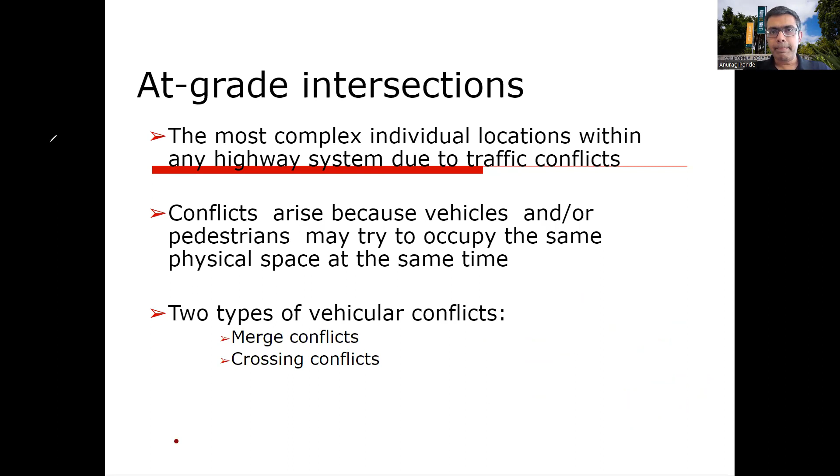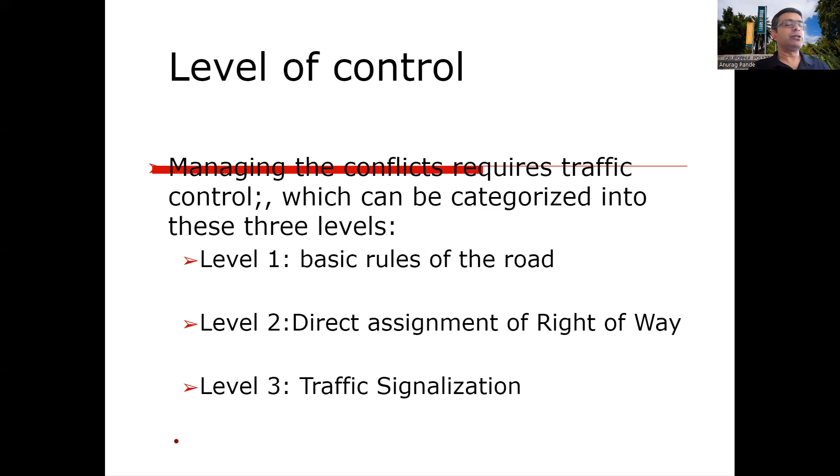So what we do to manage these conflicts is have this level of control, which can be categorized into 3 levels. One is basic rules of the road. Sometimes you will see intersections with no traffic controls - you would come across those, not always, but you might come across them in neighborhood streets, for example. There, you have the basic rules of the road, where the drivers on the left will yield to the drivers on the right. Then there is direct assignment of right-of-way - that's your yield sign or your stop sign. So that's another level of traffic control. You're directly assigning right-of-way. When you come to an intersection, if you have the stop sign, then the other person has the right-of-way. Or if it's a 4-way stop, whoever comes first has the right-of-way. So those are your direct assignment of right-of-way. And then level 3 is basically the highest level of traffic control, which is the traffic signal.

So in basic rules of the road, right-of-way is not assigned. Driver on the left yields to a driver on the right. And then through vehicles have the right-of-way over turning vehicles. You see these types of situations sometimes when you have one person making a left turn into a driveway - that's kind of an intersection, but there is no stop sign or yield sign for the left-turning folks, and they're just automatically supposed to yield to the people who are going through. So that's your basic rules of the road, and one of those rules is through vehicles have the right of way over the turning vehicle.

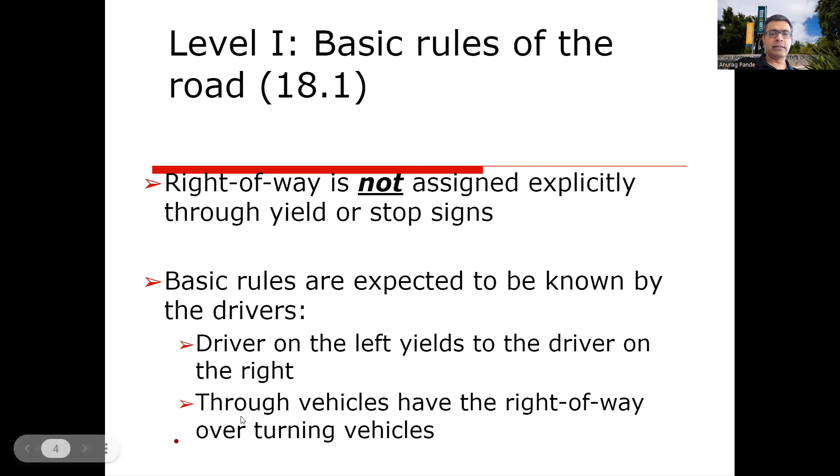So this is something that becomes important, and we'll do some problems based on this once we've covered this chapter: the limitation of sight distance at intersections caused by buildings or other obstructions. This creates a line of sight issue.

A related concept is daylighting the intersection. That means eliminating any potential hindrances that might block the driver's view of pedestrians, bicyclists, or other approaching cars, because sometimes the sight triangle might not be clear at an intersection.

So for example, if you look at an intersection like this, I'm just going to quickly draw this out.

At an intersection, sometimes you have a car approaching from this direction, a car approaching from this direction right here, and a car coming from here. They need to be able to see what's going on around them. If there is traffic approaching from this direction, they need to be able to see without any obstruction what's going on over here, and who's coming from here.

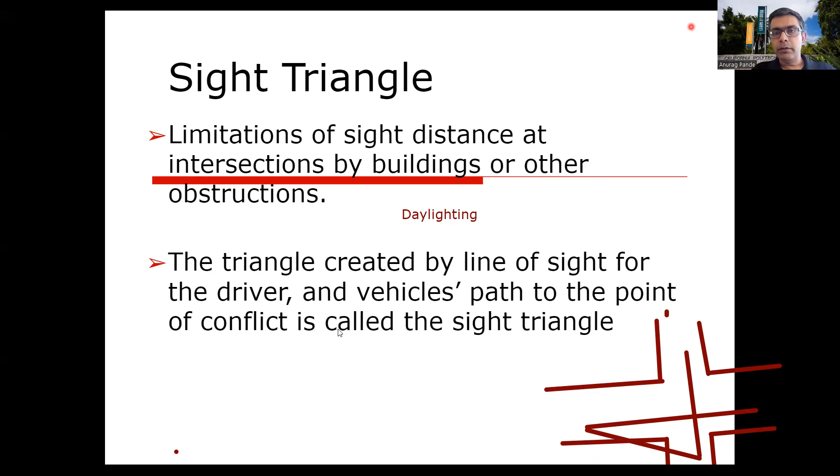Level 2 control includes your two-way stop, yield control, and multi-way stop control. All-way stop controls are typically not something we want to implement. They exist—in some shopping centers, for example—but they can be very confusing: who came first, how do pedestrians get yielded to. It could be confusing, but in some ways they're useful because everybody is at least expected to come to a full stop, or at least a rolling stop, in California.

Multi-way stop control is also a level 2 control—there is no traffic signal. We talked about warrants for traffic signals when discussing traffic studies; there are also warrants for stop controls. They're not as detailed, and if you can interpret signal warrants, you can interpret stop sign warrants just as easily. That's not an issue at all, but those also have some conditions governing them.

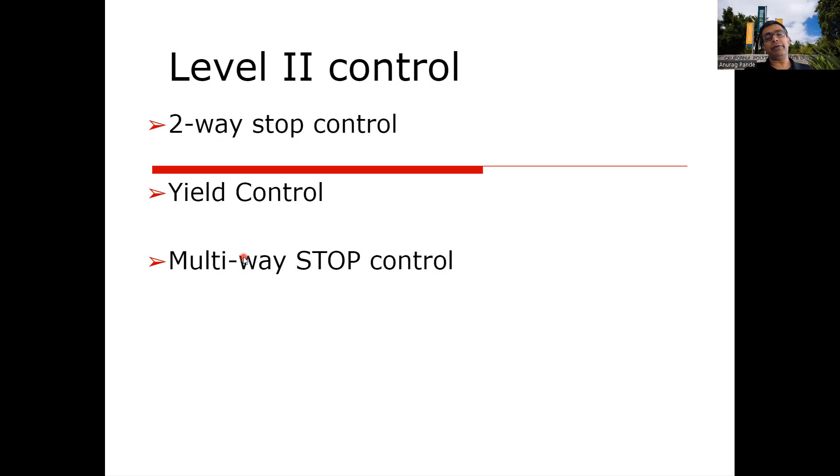So putting a stop sign, when can you put a stop sign versus not? Again, there are stop sign warrants and there are multi-way stop control warrants. So there are warrants for all of these different levels of traffic control. So we'll talk about traffic signal control, obviously mother of all traffic controls. And the idea is that the assignment of right of way is going to be complete.

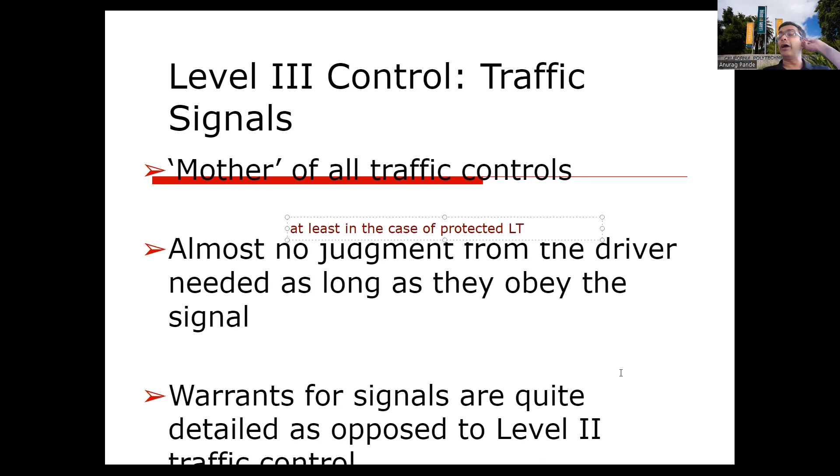The drivers won't have to apply any judgment at that point. But that's not fully true, right? Because you would have permitted left turns. So when I say almost no judgment, I'm also talking about at least in the case of protected left turn. At least in the case of protected left turn, no judgment would be required. But then again, if you have permitted left turn, so that's your green ball rather than green arrow.

So do you know what mechanism are we using now? We are trying to move away from that green ball for the permitted left turn. You know what mechanism are we using? Anybody? Yeah, back there, Max. Yeah, it's a flashing yellow arrow, FYA, flashing yellow arrow. That's basically your permitted left turn.

For protected permitted, is it just the doghouse light? Doghouse light? The 5 light array? Yeah. So sometimes some signals have both protected left turn phases and then they allow some permitted left turn as well, right? So there you need sort of both of those things, right?

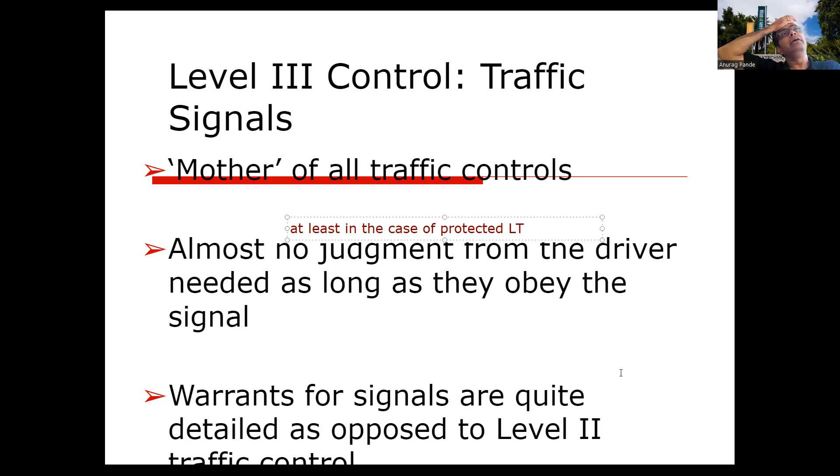So you need to be able to show a green arrow, but then if there's a flashing yellow arrow, you might be able to denote that. Although right now, I don't think a lot of communities have implemented flashing yellow arrow with a protected green arrow turn. So that's also sort of a work in progress, the flashing arrow implementation, but it's really been found to be way safer than the green ball indicator. That's basically what's used here. And as I said, warrants for signals are very detailed.

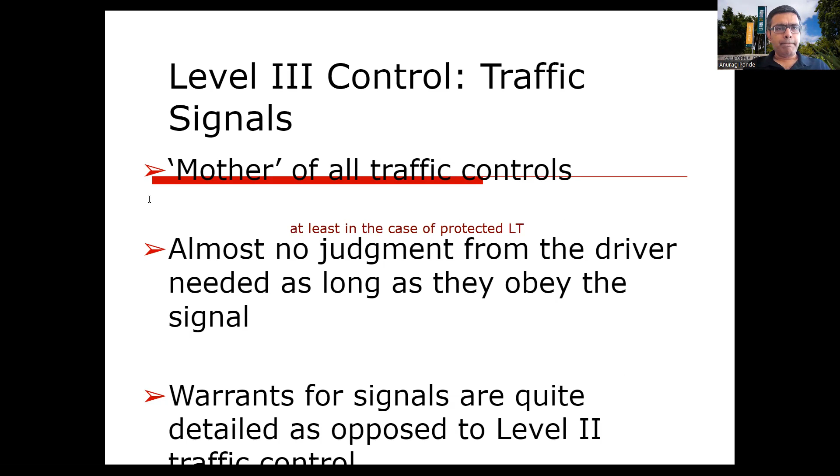And then when you get to the signal control, there is pre-timed and actuated control. We talked about that a little bit. And in actuated control, we have semi-actuated, fully actuated. And then there is this volume density control, and sometimes it's called adaptive signals that are completely reliant on not detecting individual vehicles, but sort of looking at what's happening overall at the intersection approach, what type of volume is approaching, what type of congestion is happening on each of these lanes. So those are sort of your more advanced type of signals that are called volume density control.

And they also have sort of great detection capabilities, but they're detecting not like group detectors. In the case of semi-actuated and fully actuated control signals, they're trying to detect the presence of individual vehicle over the detector or on the camera. But in volume density control, those signals are looking at sort of multiple vehicles, what's happening with the volume, what's the rate of the volume coming in on the approach, and what's the density, how much congestion there is, so that they can anticipate what's going to be the demand at the intersection in the very near future.

And then, so those are sort of the advanced type of signals. Again, the point of all of these is to become more demand responsive, right? And obviously demand responsive signals like actuated and fully actuated and even volume density, they have value in terms of operations, right? Because they can really minimize the delay compared to a pre-timed signal.

Still, you might have noticed that when there is construction on the road, sometimes they would convert that signal into a pre-timed signal. And that can be pretty frustrating because that means if they have construction going on and the detectors, for example, are not working because they've dug up the road or whatever, and there is something wrong with the detectors, sometimes the detectors go bad, or sometimes their camera system doesn't work. Whatever is the reason, we switch over to pre-timed operation, and that can be pretty frustrating because you're saying there is no demand that's competing with you, but you still have to stop.

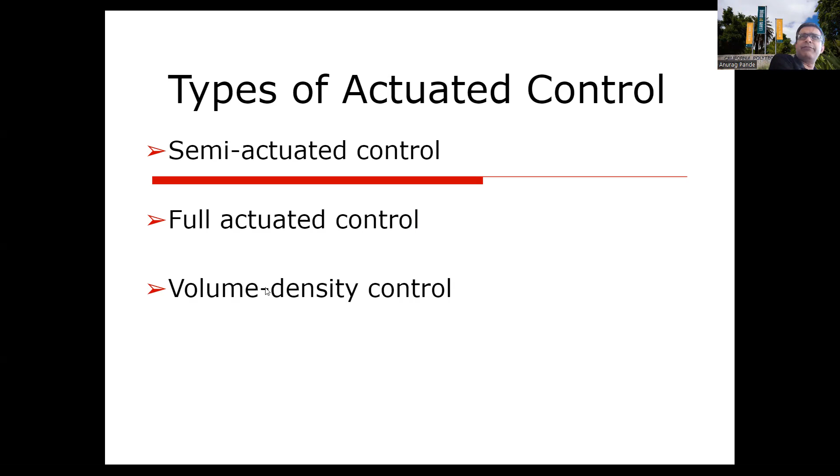That's why we've pretty much moved away from pre-timed signal design only. We do pre-timing of signals, but either because of construction, or when we can make sure there is demand coming in from all sides so no side is completely uncongested. So every side is fully congested, and then every signal cycle just maxes out. We'll talk about what maxing out is, but the idea is it just runs its course. You can only give that approach so much green, and it has taken that green time. So that's like a fully congested situation or a coordinated signal cycle basis where we use pre-timed signals. But other than that, we run actuated signal control because they're good for both safety and operations.

So let's now talk about actual signal timing. Today's lecture will get to the point of dealing with yellow and all-red intervals, because those are important from a safety perspective as well. But signal phasing is also important because signal phasing is the sequence of individual phases.

Signal phasing is the sequence of individual signal phases, or combination of phases, within a cycle that defines the order. When we say individual phases or combination of phases, there could be multiple phases. For example, there could be a permitted-protected phase, which is sometimes thought of as a single phase. So it's a sequence of either single phases or combinations of phases within a cycle that define the order in which various pedestrian and vehicle movements are assigned the right of way.

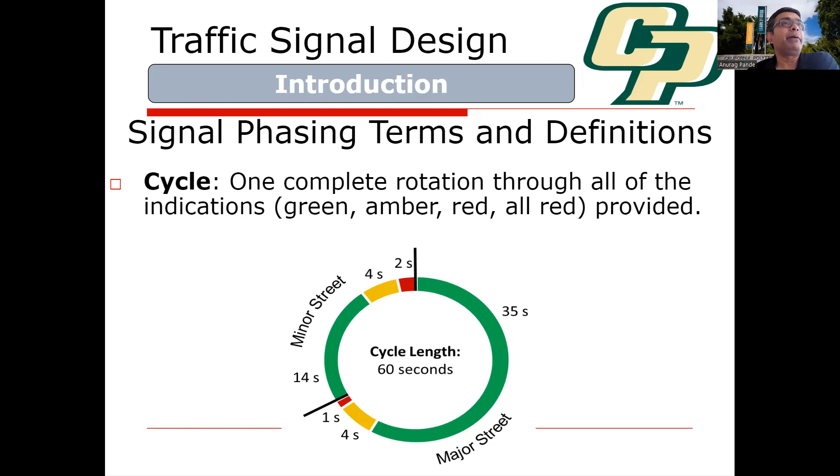I think we should probably favor safety. We should, but it doesn't always happen. And the drivers are pretty frustrated about delays, and that's the problem right there. Yes. I'm just curious, is there a point where it would just be easier to consider a flyover ramp for a certain movement? Yeah, but those are very, very expensive.

So the question is, at what point do we give up on the signal and start thinking, okay, maybe we just need a grade separated intersection, just design an interchange or ramp. Typically you won't see that unless it's an uninterrupted flow facility itself, like a 101, Highway 1 type thing. Even on Highway 1, you will see some traffic signals.

So there is that benefit cost analysis that has to be done then, right? But before you get to that point, because creating an interchange is such a high cost project, we try to minimize that to the extent possible. So that would be a good idea to think about, grade separating the intersections, and we do have to do that a lot of times, but that's not always the ideal situation.

Because it's so expensive. Signal phasing terms and definitions: cycle length, the time in seconds that it takes a signal to complete one full cycle of indication. Usual values are between 40 and 180 seconds, measured in 5-second increments.

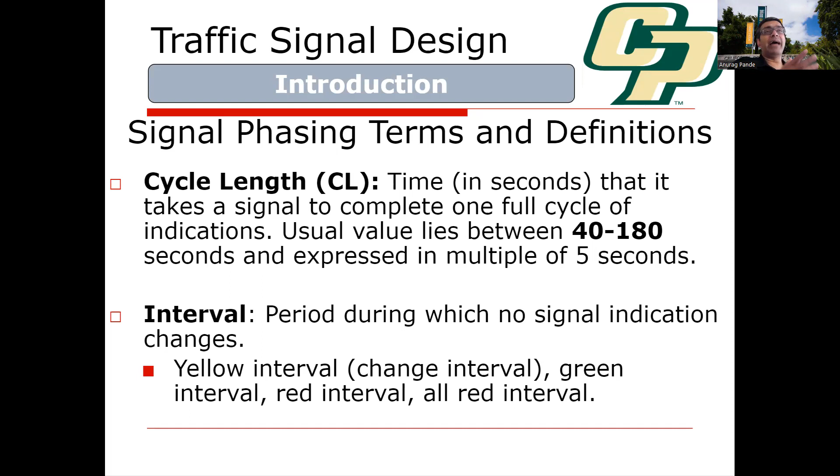Okay. Interval is the period during which no signal indication changes. The yellow interval is the change interval. So basically the interval where nothing changes in the cycle, that's your interval. It could be the yellow interval, the green interval for a certain approach, the red interval for that approach, and then the all-red interval when all approaches are red, which we require for safety to clear out the intersection.

A phase includes the green interval, the change interval, and the all-red interval. So a phase would include the green time, yellow time, and all-red time for that phase. And all-red time is also called the clearance interval.

So a phase is a sum of 3 different indication times: yellow, green, and all red, right? Saturation flow rate, maximum number of vehicles observed per unit time of green, right? So per unit time means per hour of green. So the unit for saturation flow rate is vehicles per hour of green per lane. Okay, that's your saturation flow rate.

On a typical intersection lane, if it's a flat, your typical urban intersection with the speeds that we have in our urban areas, unfortunately, 40, 45 miles an hour, you're talking about maybe 1800. That's a pretty high number, but you can achieve that. Yes. NCHRP uses 1700. 1700 is probably right, they use a little bit lower value, because they're probably assuming a little bit lower approach speed. Down to 1400 if you start doing heavy vehicles.

Right. And it could change if you have a lot of right turners, for example, within that approach. So those numbers could go down. But typically, 1900 is probably the highest limit that you would see. NCHRP, as was mentioned, uses around 1700, which is reasonable. Again, you could probably get this up if you raise the speed, right? If the approach speed is high, you could probably move more vehicles per hour of green, but you probably don't want that, at least not in all cases.

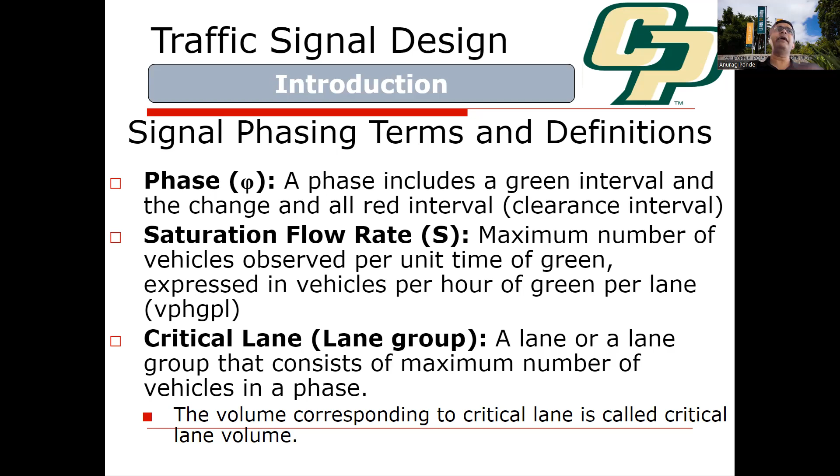So your critical lane group, when you're assigning the green time, what are you going to base your timing on? The critical lane group is what you're going to base it on. So if your eastbound has higher demand, then you're going to base your timing on eastbound traffic. If westbound has higher demand, then that becomes your critical lane group.

So signal phasing is observed during peak hour, right? So basically we want to observe. So for capacity of the signal and timing of the signal, it's very important that we make an estimate of what we call the saturation flow rate. Okay, saturation flow rate happens during peak hour, right? So we need a pretty good amount of traffic.

And saturation flow rate is the flow rate at which, if there is a steady stream of demand, right? If there is pretty heavy demand and you had continuous green on a signal, at what rate would you be able to discharge the vehicles? That's your saturation flow rate. So you require saturated flow conditions to be able to observe that for the most part.

Maximum number of vehicles per unit of time per green cycle: observe the full stream of vehicles passing through the green. If a full stream of vehicles kept coming and coming, how many vehicles would you be able to pass through?

Now the question is, what happens if you have a signal where there is demand, but it's not saturation demand? How would you estimate saturation flow rate in that scenario?

Yeah, do you want to say something? I was gonna say just estimate it based off the traffic volumes, percent trucks, and how many right turning vehicles there are, and just use the HCM equation. Right, there is an HCM equation for it. There are two ways of doing that work.

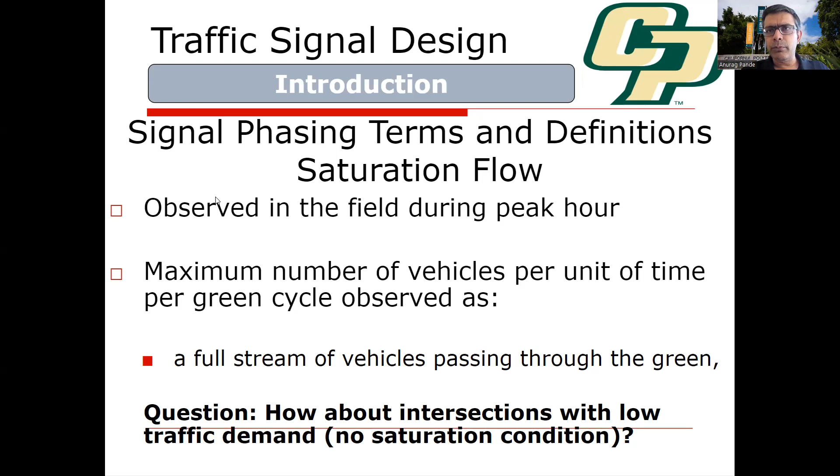But there's actually another way, by collecting data, maybe not under fully saturated conditions, but even under mildly saturated conditions. That work is done using... let me go back to an empty sheet here, so let me show you.

Let's see if I can draw some boxes. Let's say this is an intersection approach. You're approaching an intersection, and this is the intersection right here, with my stoplight over here, and my stop line right here. Now I have cars that are stopped here. Obviously I don't have a fully saturated condition, because once the light turns green, these cars will flow through and empty out.

So I don't actually have to wait for fully saturated, absolutely congested conditions to develop. I might be able to estimate my saturation flow rate anytime I have at least 5 vehicles lining up at a red light, then I can estimate the saturation flow rate for that approach. We used to do a lab on that, and you might still do it in this year's class.

How do we do that? We do that by looking at, on the red cycle, when the signal is red, there will be a queue of vehicles, and we need the queue to be at least 5 vehicles—the longer the better, but at least 5 vehicles have to be in the queue for us to do this estimation of saturation flow rate.

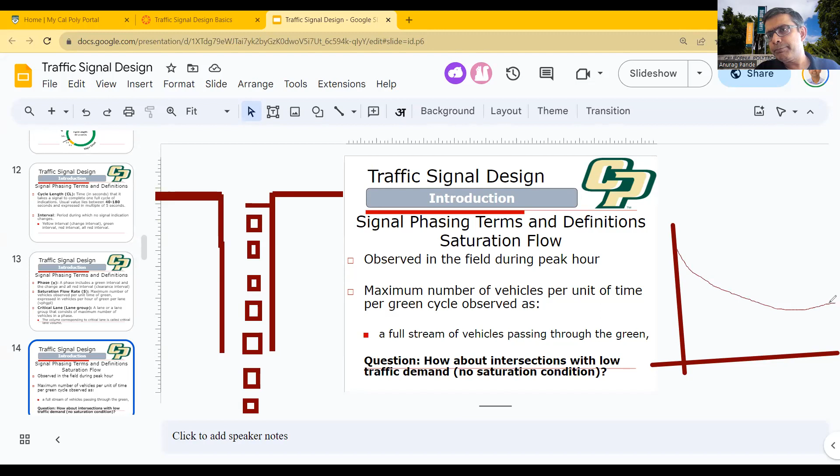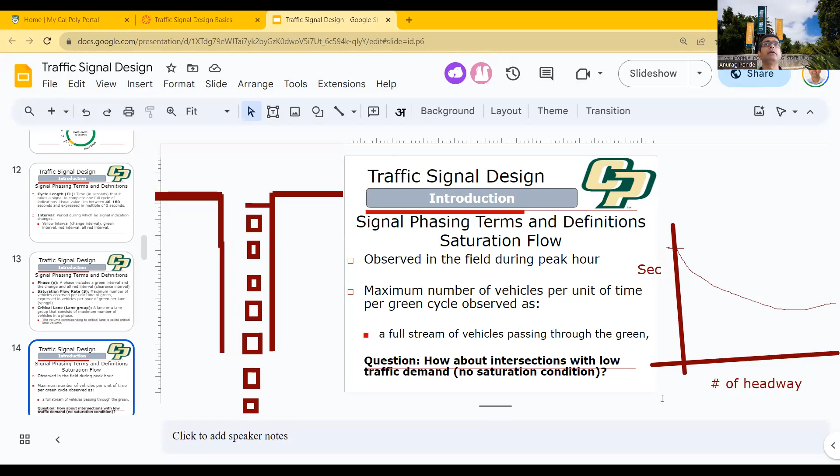What will happen is that the gap between the first and second vehicle is your first headway. Here you'll have number of headway on the x-axis, and time in seconds on the other axis. That time will be pretty high for the first headway, or you can even think of it as the 0th headway, where number of headway is 0. This is the time between when the light turns green and the first person crosses this stop line right here.

So when the light turns green and the first person crosses the stop line, that's your 0th headway. Your first headway would be the difference between when this person passes the line versus when the next person passes the line. That second headway would be a little smaller, the third even smaller, the fourth even smaller, because these subsequent vehicles have had time to react to the green light. They're ready to go.

As their time comes, this gap keeps reducing, and after the fourth or fifth headway, this becomes sort of a constant line of vehicles. Once you've established that saturation, this becomes your saturation headway. So if you have more, that's great, but headways after the fourth or fifth become constant, and that's what we call the saturation headway. This time interval, if you draw a line from here, is called the saturation headway.

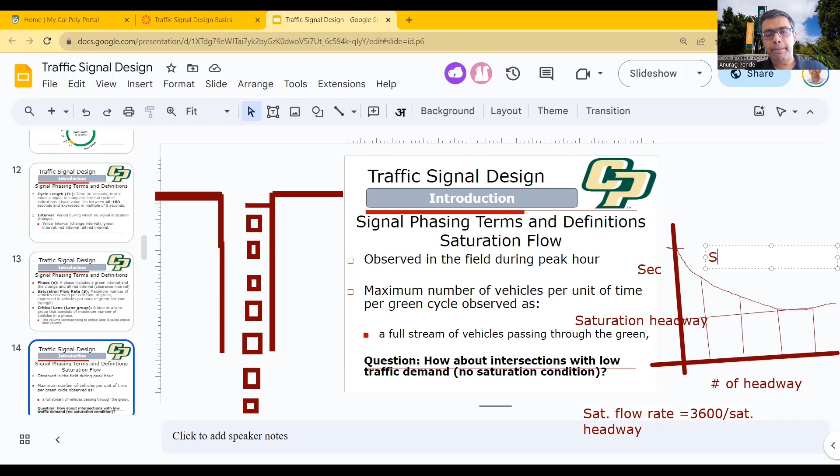We add up all these times that you're losing over and above the saturation headway. For startup lost time, we're adding the time from here to here, here to here, here to here, and whatever this little thing is. If there's anything like that over there, then that time as well. So you add up those times and that's your startup lost time.

We can estimate saturation flow rate even from a field study, and there would be an example of this as well, so we'll work that out. But that's your saturation flow rate. So let's go next here.

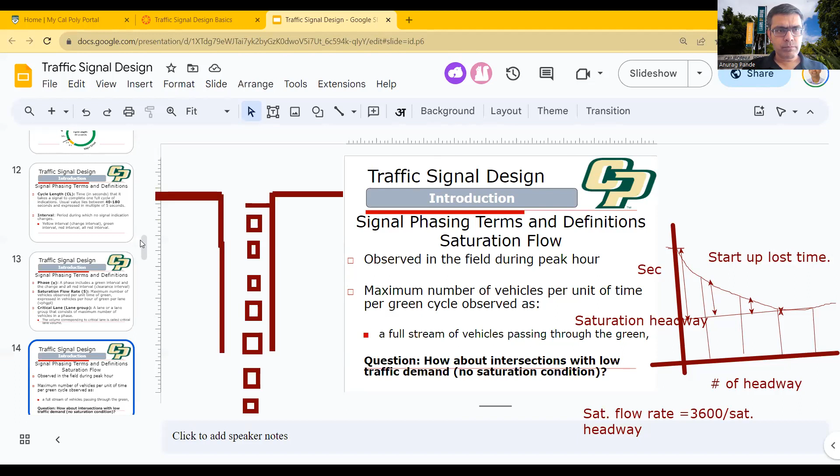Lost time is the wasted time during which no one is getting into the intersection - nobody can move. It's a big determinant of capacity and delay. It occurs twice at each phase, so as you add phases, you're losing time twice - once at the startup, once at the end. At the beginning of the phase, L1, usually about 2 seconds are lost at startup. Then at the end of the phase, about 1 to 3 seconds are lost. That's another sort of lost time.

Lost time per cycle is about - if you have anywhere between 2 to 4 phases, you could end up losing anywhere from 6 to 20 seconds every cycle you run. You could say, okay, if I'm talking about hourly, I can minimize my lost time by minimizing my number of cycles. But again, that's bad because then you're getting into pretty long cycles, so that's not always ideal either. More phases obviously lead to more delay, and you can't keep making the cycle longer to avoid those delays - there are no free lunches to be had either. But again, from a safety perspective, you still might need more phases.

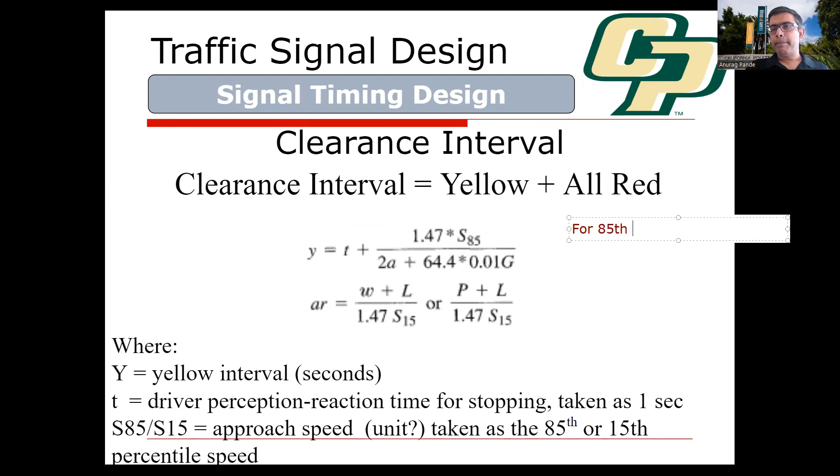Add 5 miles per hour to the speed limit for the 85th percentile. And then for the 15th, subtract 5 miles per hour from the speed limit. That's usually the case, so 15th to 85th is your 10 miles per hour pace, which is reasonable.

But again, this is like interrupted flow you're talking about, right? So think about the context here. If you have traffic signals on an approach, that means you have an interrupted flow situation, and that means you're not talking about a freeway. A freeway won't have a red light or anything like that. So this is an interrupted flow situation where speeds are lower, and going above 5 miles per hour is a fairly reasonable question. So that's a rule of thumb you could use.

For S85, you can add 5 miles per hour to the speed limit. For S15, you can subtract it. That makes the yellow interval larger and the all-red interval larger as well if you apply these formulas and not directly the speed limit, which I think is reasonable because you want to be more conservative when you provide these. Obviously, if you have an all-red interval and yellow interval, that means nobody would move for some time, and that could happen, but that's okay because that might be reasonable given the safety considerations.

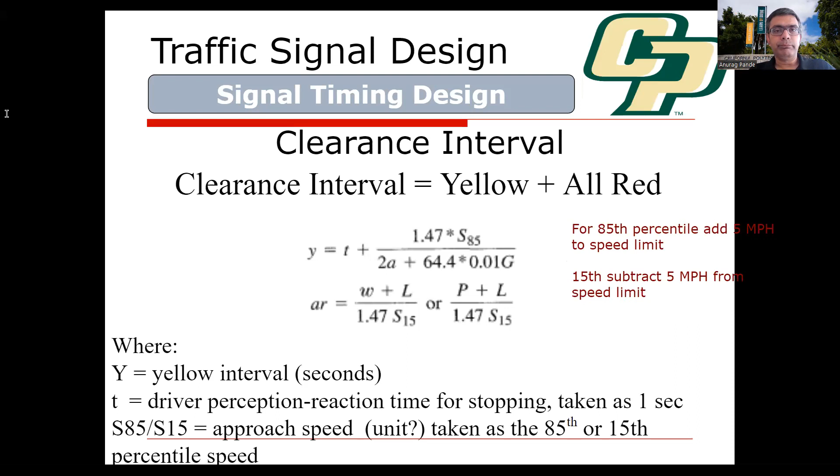So this clearance interval, the range of yellow interval is 2.5 to 6 seconds, rounded up to the nearest 1/10 of a second. And then the range of all-red interval is between 1 to 3 seconds. That's the typical value you would find in most places.

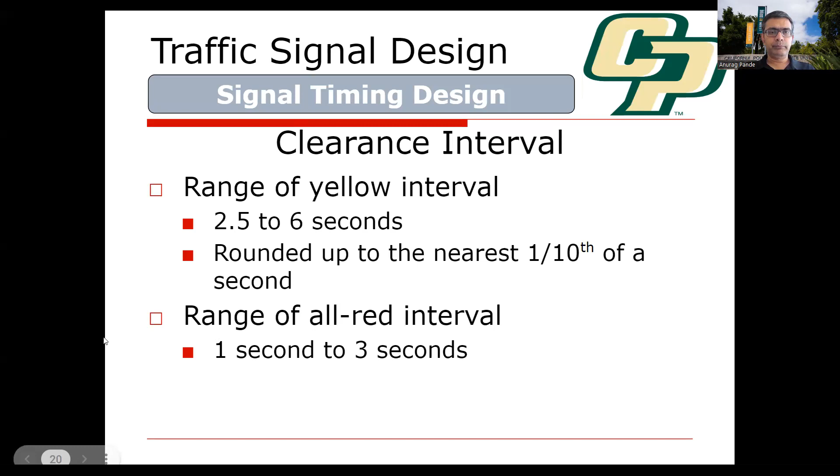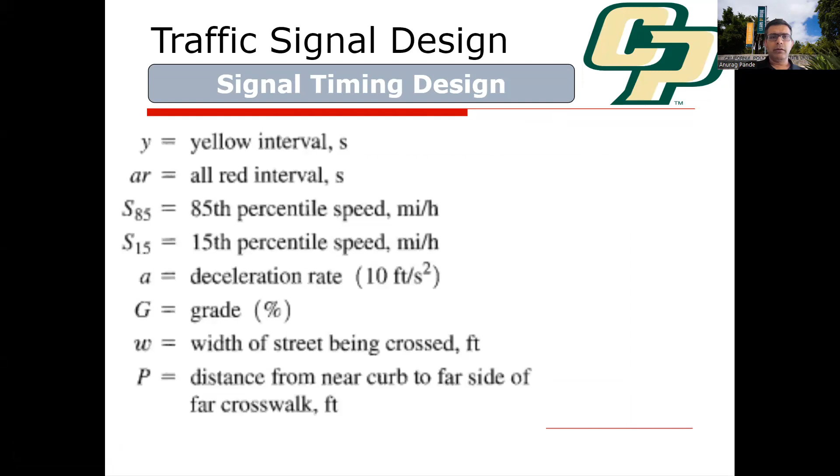Now, this is what happens if you look at that yellow interval, and you estimate from that yellow interval how much distance you can travel if you're traveling at the 85th percentile speed. There is a location that sort of becomes what we call the dilemma zone.

So think about this: the idea is that if you are very far from the signal and you see the light turning yellow, they observe that most drivers from that point stop. But there comes a point where the percentage of drivers that decide to stop, and the percentage of drivers that decide to just go on yellow—maybe pedal, or just put the gas on and go—becomes higher at that point.

So this is what we call the dilemma zone, and we'll work out a problem on the dilemma zone as well. But the idea is it's the zone at which you start to see some drivers deciding to stop and some drivers deciding to go. That could happen at any location, but there are specific thresholds at which we start to see almost everybody goes from here.

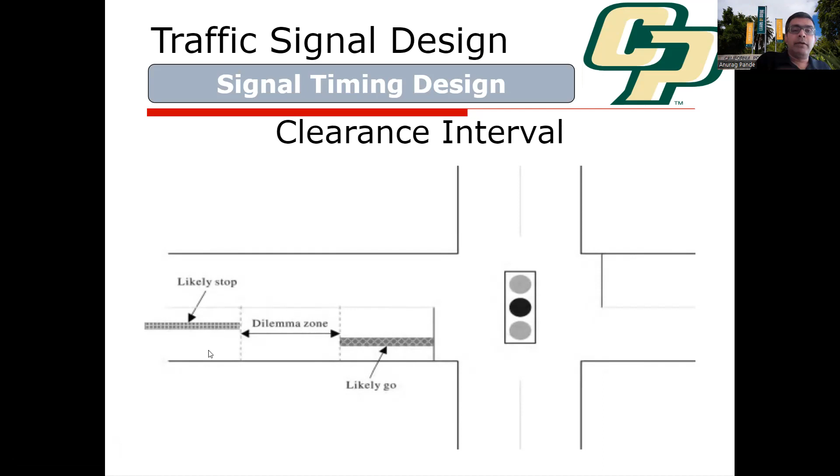If drivers are close to the stop line, up until a certain distance, everybody just goes. Beyond a certain distance, everybody just stops. But in the middle, maybe there's a zone where if you're very close to this first line, instead of 100% being able to go, 70% will go and 30% will decide to stop. In the middle, maybe it's 50-50. Further back, it's 70-30 in the opposite direction, meaning 70% start to stop, 30% want to go. That's what causes signals to sometimes make the rear end crash problem worse.

This is the phenomenon that causes it. Because there's a dilemma zone where some drivers will say, yeah, I could probably accelerate and just go, while other drivers will say, okay no, I need to stop. That's what causes problems.

With actuated signals, can't they implement something called advanced yellow light dilemma zone detection, that detects when the signal is about to end, and only puts on the yellow phase when it detects no vehicles are in the dilemma zone?

Yeah, those are sort of actuated technologies, but they're not something you'll find at every signal. Most signals have the yellow signal specifically timed for each phase. So most locations won't have that, but there are some newer technologies where the light won't turn yellow until there are no vehicles in the dilemma zone identified for that location.

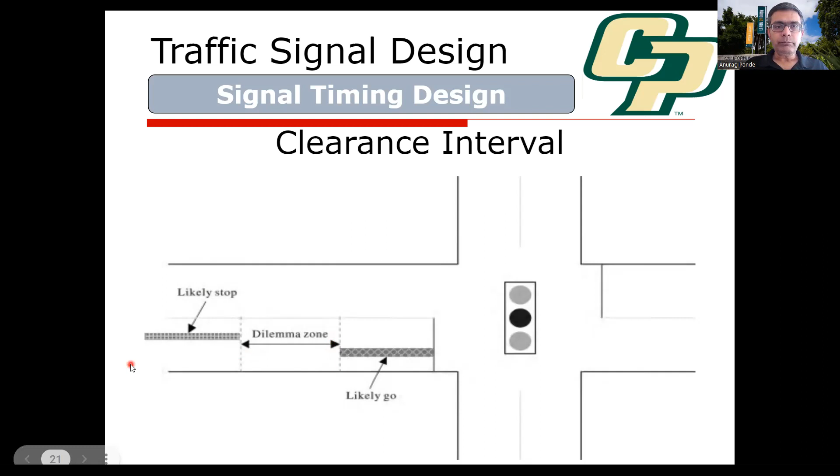So let's talk about some quick questions. What's the purpose of having a yellow change interval as a component of traffic signal timing? Options include: to clear the intersection of vehicles, to reduce the likelihood of right angle crashes at the intersection, to inform drivers that the right of way is about to end and they should stop, or to allow the driver to safely cross the intersection if they're unable to stop before the signal turns red. So what's the reason, or is it all of the above? What do you think? If you see more than one answer as correct, you can guess.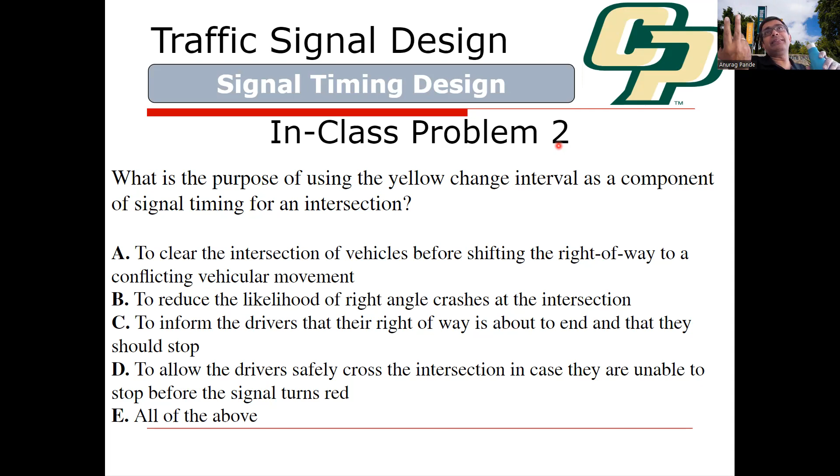Actually, the answer is all of the above. The yellow change interval warns drivers to safely stop at the intersection, or lets them safely cross if they're unable to stop. When you see a yellow light, that's the time to make a decision: should I start to cross, make my maneuver so I can cross, or should I start applying brakes? That depends on the distance, and that leads to what we call the dilemma zone.

B is also correct: clearing the intersection by shifting the right of way. The yellow change interval reduces the likelihood of both right angle and head-on crashes, depending on the phase sequence. So if you have left-turning vehicles or crossing vehicles coming in, there will be fewer crashes of that type.

Obviously, if you have east-west, and right after east-west, north-south goes, then you're talking about right-angle collisions. Otherwise, you're talking sort of head-on crashes between the left turners and the through vehicles, if the ordering of the phase is such.

Yellow principle should warn the drivers. So this is sort of the principal purpose. If you're asked the principal purpose, that would be to let the drivers know that the signal is about to change. And I know a lot of countries, not the US obviously, will use yellow at the start of the green signal as well. Having driven in the US for such a long time, I find that confusing now. But there are countries that use yellow at the start of the green phase as well, so they might find the situation here confusing. It just depends on what you're used to.

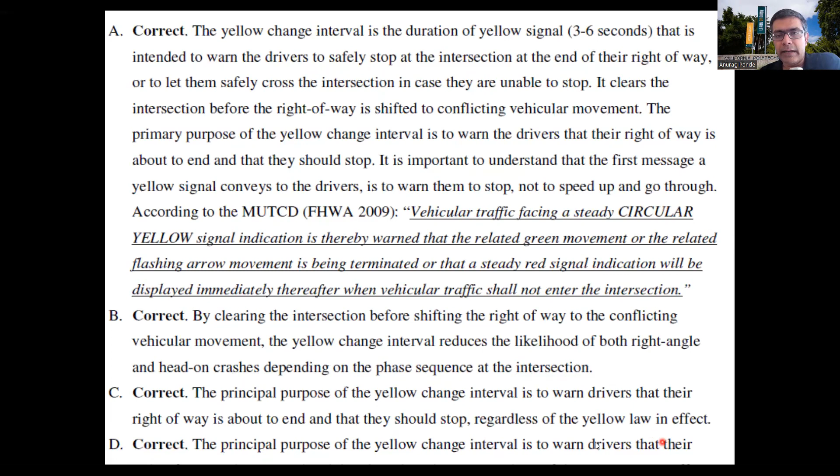And then principal purpose, again, another principle: warn drivers that their right of way is about to end. So basically, change is about to happen. So all of these are sort of correct answers.

Correct statement: yellow change interval at a signalized intersection. Which one do you think is the most correct statement here? Let's give it one read, maybe talk to your neighbor and see if you can figure this out. Take a minute to read through this. Talk to your neighbor, maybe. Thoughts, questions? Does your neighbor agree with you? Think about that.

The purpose of the yellow interval is to clear both the vehicles and the pedestrians from intersections. Does that sound right? No, right? That's not correct, because the all-red interval is for that. So A is not the right answer. Yellow change interval is an unnecessary application at an intersection where a red clearance interval is used. No, because the principal purpose, as we saw, is to let the drivers know that the right of way is about to change, right? So that's sort of a transition phase. So B is not correct either.

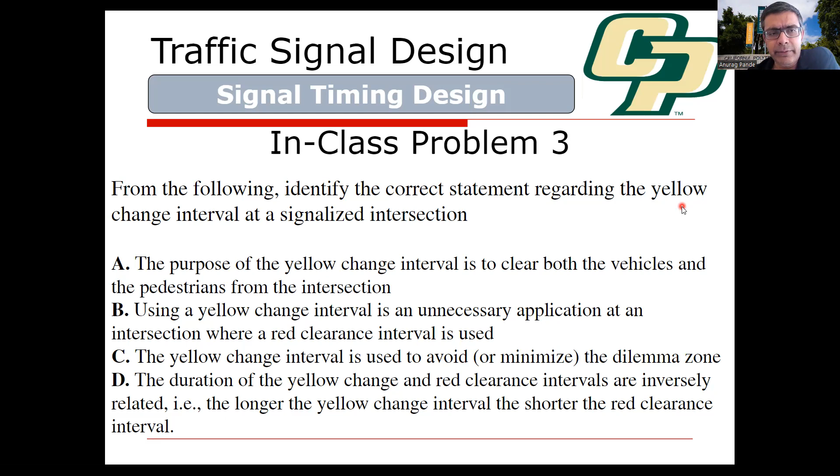Yellow change interval can be used to minimize the dilemma zone. That could potentially be done. And then the last one is the duration of the yellow change and red clearance intervals are inversely related: the longer the yellow, the shorter the red interval. I don't know about this. I think C is probably the right answer here. In the current ITE recommended practice, yellow and all-red intervals are considered separately and calculated with different equations. So we don't actually worry about this at all. When you're calculating yellow, that's an independent calculation from calculating the all-red.

So dilemma zone, the area upstream of the signal where drivers face difficulty deciding. If you properly time your yellow interval, you can reduce it. You won't be able to eliminate it, because there would always be some distance where some drivers will make one decision and others will make the other decision. But you can minimize it: if you increase the yellow interval, you could potentially minimize the dilemma zone.

Okay. Incorrect statement now. So what we're trying to do here is find which one is not correct. Which one is the incorrect statement? Talk to your neighbor potentially. Questions, thoughts? Does A sound like the correct answer? A sounds like it should be true, right? Or what do you think? Let's go over these statements one by one. How about A?

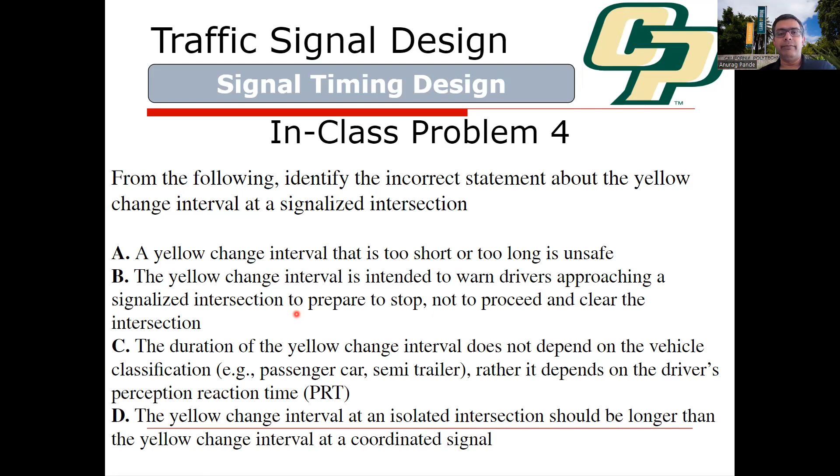It depends. I think it depends on both, because if there are a lot of vehicles that are tractor trailers, then you might have to adjust your dilemma zone or your yellow interval, depending upon what kind of deceleration rate on average a vehicle can generate. So you might have to lower that number a if you have a lot of tractor trailers in your traffic mix. And so we got this.

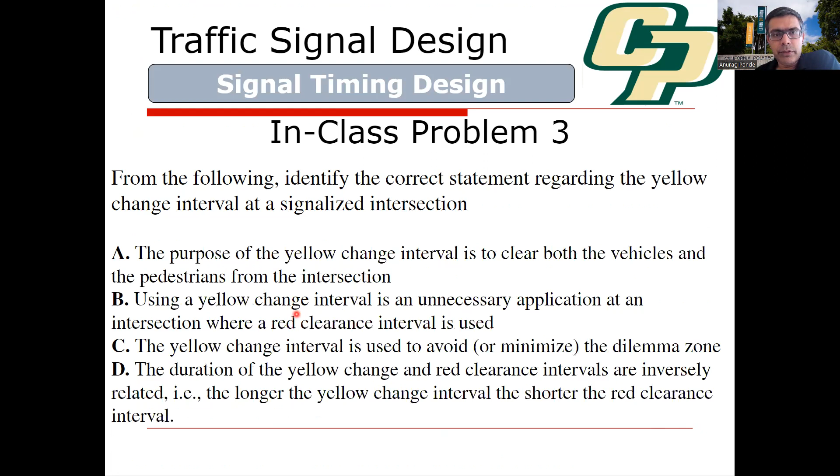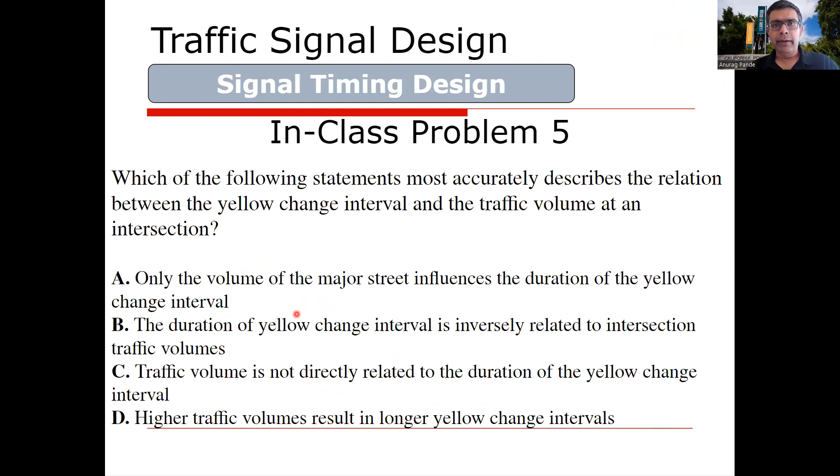Okay. Oh, am I going up? Okay, I need to go down. Sorry. Oh, we're almost out of time. Okay. So we talked about this problem. Yeah, I don't know why I said the answer for B, but I think I should have said, if you look at the formula, you will see that that might not be the correct answer.